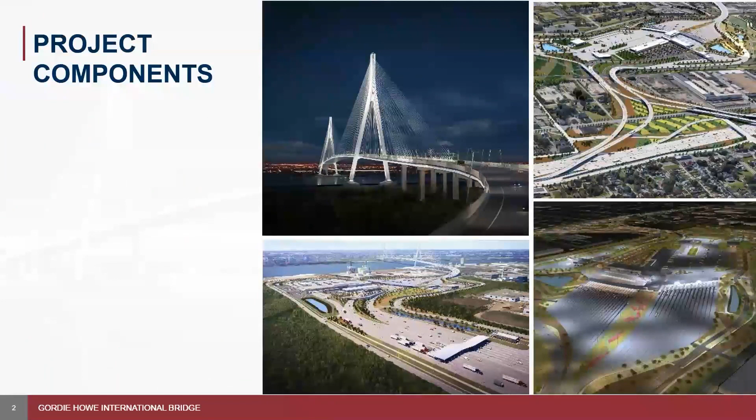We are nearing the peak construction period, which will hit in 2022 and continue through 2023. During this period, 70% of all construction hours are anticipated to occur.

A cable-stayed bridge will be constructed with 6 lanes, 3 Canadian bound, 3 US bound, and a clear span of half a mile with no piers in the water. There are 2 approach bridges, one on each side, and the total length between abutments is 1.5 miles, making this one of the longest cable-stayed bridges in North America. The main bridge towers will be approximately 720 feet high, rivaling the height of the tallest building, the GM Renaissance Center, located in downtown Detroit.

The bridge will also include a multi-use path for pedestrians and cyclists to walk or bike across the border. Use of this path will be toll-free.

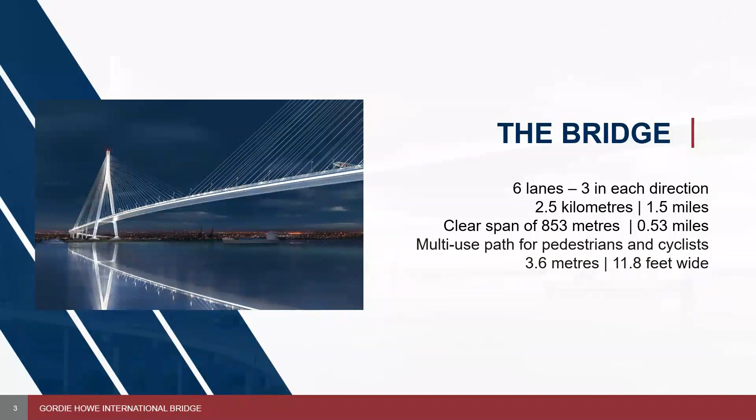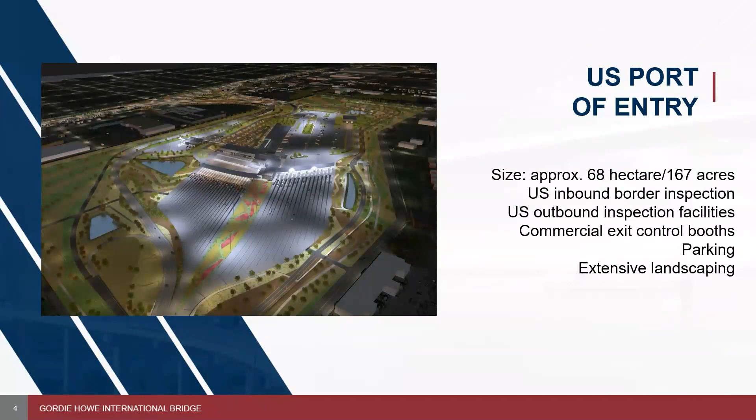The U.S. Port of Entry, located in the Delray community of Detroit, boasts 167 acres, making it one of the largest ports of entry in North America once constructed. Buildings will make up close to 330,000 square feet and include inbound border inspection facilities for both passenger and commercial vehicles, outbound inspection facilities, and commercial exit control booths. The footprint allows for the installation of further technology and the addition of expanded border processing facilities.

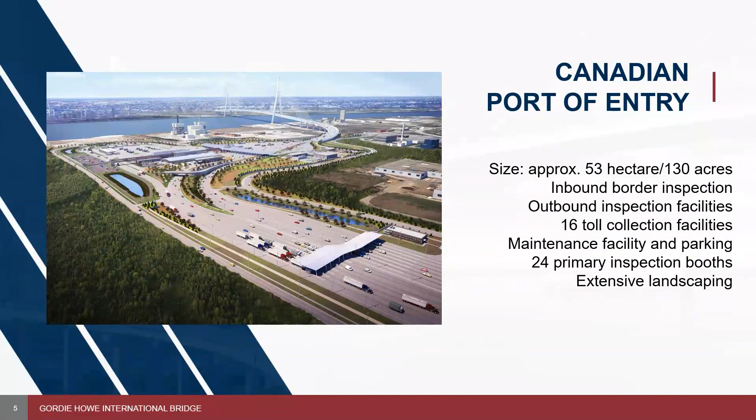On the Canadian side, the Port of Entry is approximately 130 acres in size and includes over 130,000 square feet in building space. Tolling will take place at the Canadian Port of Entry, with 16 toll booths being constructed. Once constructed, this port will be the largest Canadian port along the Canada-US border and one of the largest anywhere in North America. Once constructed, the Gordie Howe International Bridge will connect directly onto the Michigan Interchange, also known as I-75.

As part of the project, I-75 will undergo significant construction activities, including the demolition and removal of existing infrastructure and reconstruction of select local roadways and bridges. This includes 4 new road bridges, 5 new pedestrian bridges, widened roads at key intersections to allow transport trucks to make full uninterrupted turns, primary connecting ramps to and from the US POE, and reconfiguration of I-75 interchange ramps and service drives.

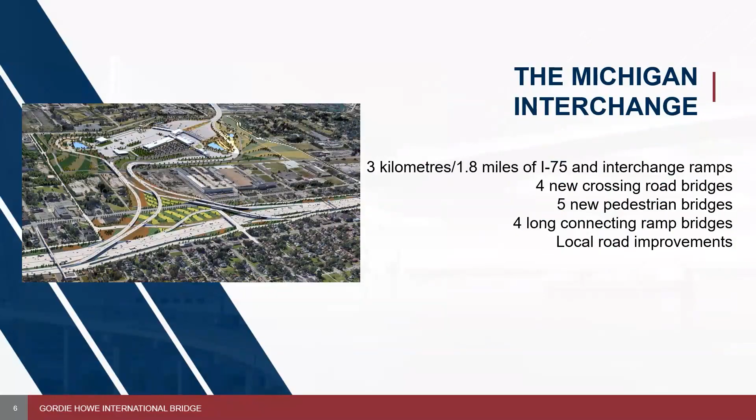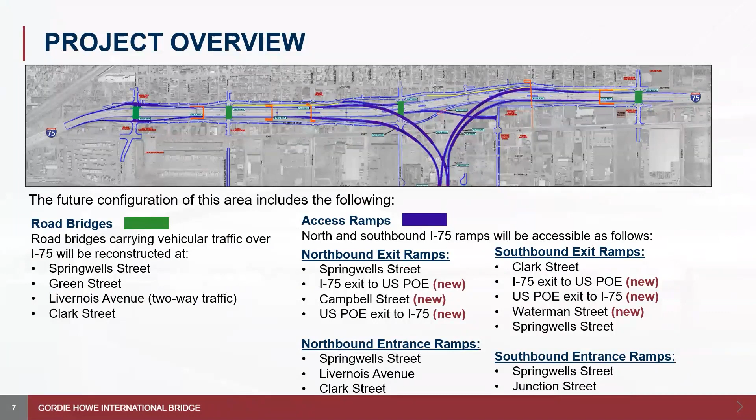To meet requirements included in the final Environmental Impact Statement, or FEIS, Bridging North America plans to construct noise walls, traffic sound barriers, along 3 sections of southbound I-75 to help mitigate traffic noise for nearby residents.

In 2009, the Michigan Department of Transportation, or MDOT, identified locations for the 3 sound walls to be built along southbound I-75. MDOT conducted a traffic analysis in neighborhoods along the I-75 corridor to determine if residents experienced traffic noise impacts. A computer analysis was used to forecast future projected traffic levels. MDOT also completed a more detailed noise wall analysis in those specific areas.

Based on these activities, the locations identified for noise walls are Green Street to Waterman Street, Dragoon Street to Junction Avenue, and Junction Avenue to Clark Street.

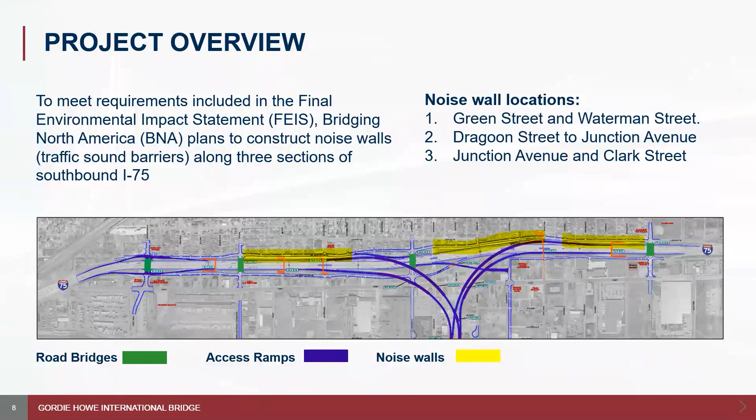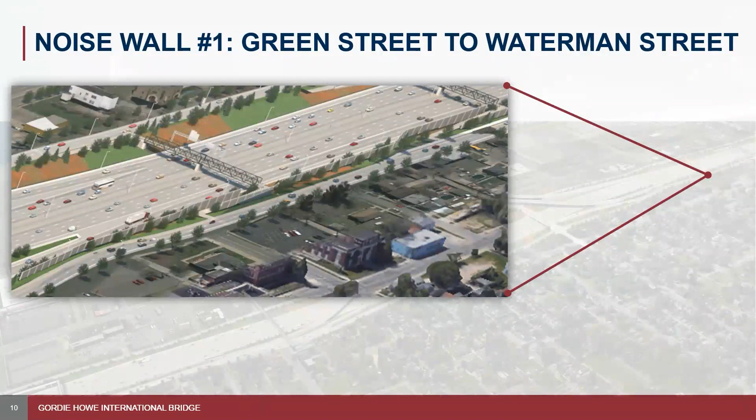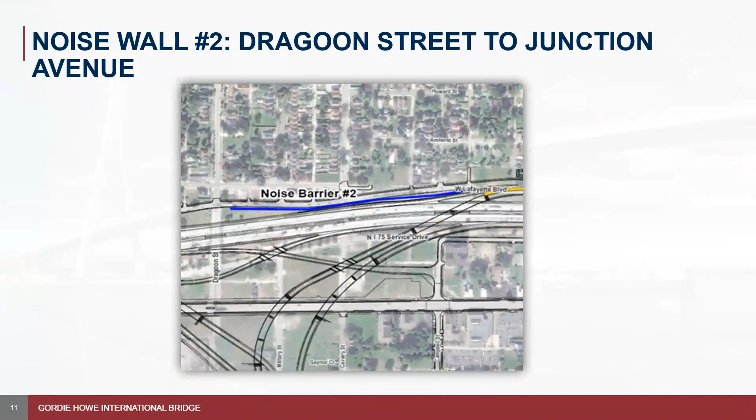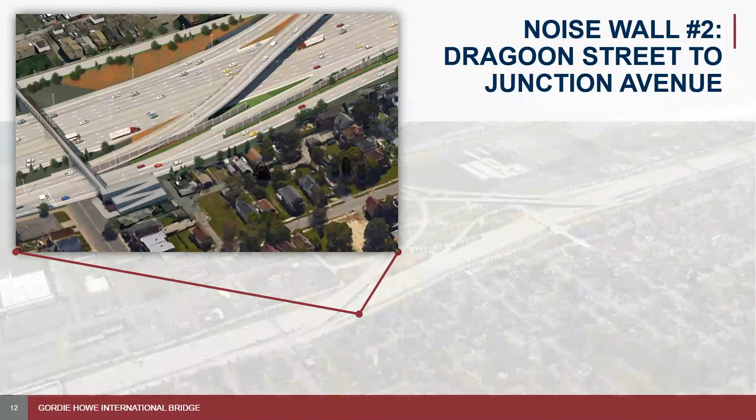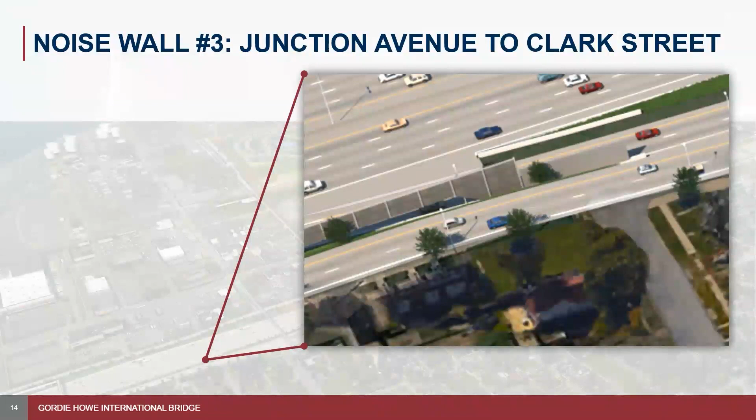Noise wall 3 is to be constructed between Junction Avenue and Clark Street. This artistic rendering illustrates the wall between Junction Avenue and Clark Street. All noise walls will vary in height from 10 to 20 feet.

Going back to how the noise wall locations were identified, prior to 2009, MDOT performed a preliminary analysis of traffic noise in neighborhoods along the I-75 corridor to determine if residents experienced traffic noise impacts. A computer analysis was used to forecast future project traffic levels, and following that, MDOT completed a more detailed analysis for those specific areas. The locations of the noise walls are based on extensive analysis and MDOT's policy of feasibility and reasonableness.

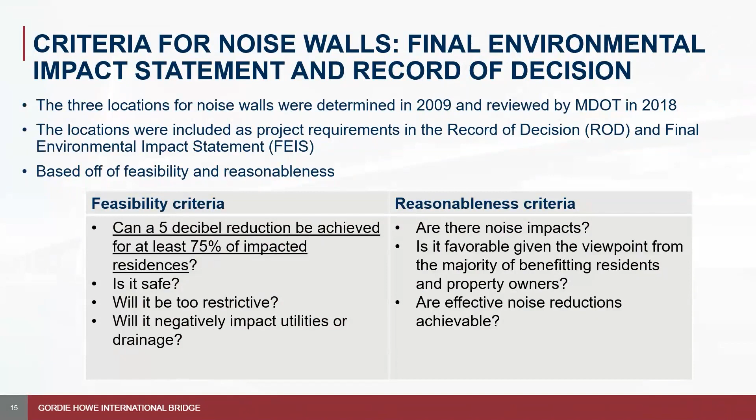You may be wondering what a decibel is. A decibel is a measurement of sound. Loud sounds have higher decibels, while soft sounds have lower. For example, the sound of a food blender would be roughly 90 decibels if you were standing close to it. The sounds you may hear while standing outside in the country at night would be roughly 20 to 30 decibels.

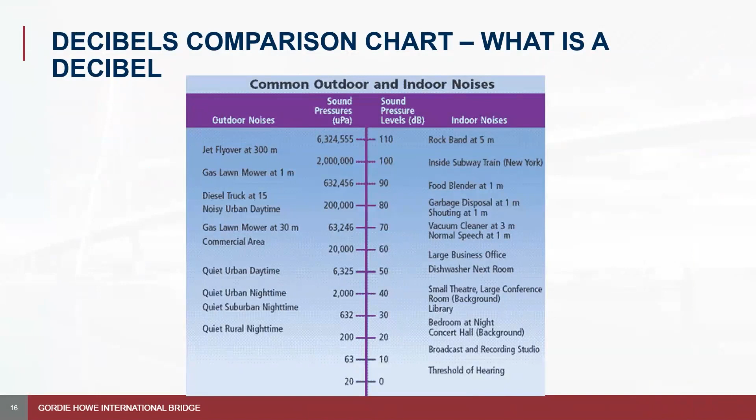The noise walls will be built between the freeway and the service drives on state-owned land. They will not affect the sidewalks on the service drives. Where space is available, trees, shrubs, and grasses will be added where feasible.

The noise wall heights will vary based upon the previous evaluation conducted by MDOT, ranging from 10 feet to 20 feet in some places. Walls will be made of precast concrete panels approximately 8 inches in width. The panels will connect to form a continuous noise barrier.

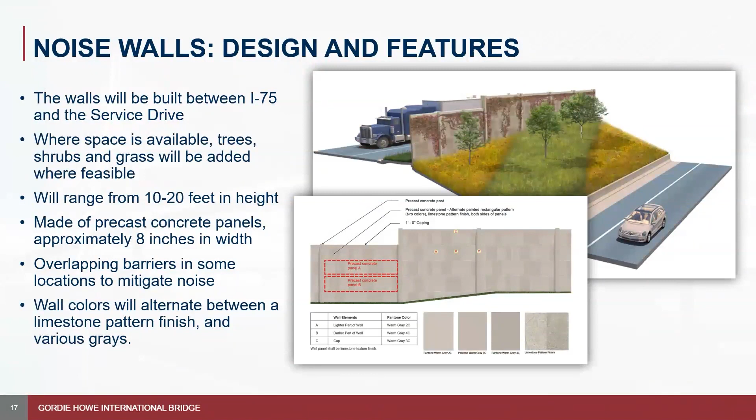The walls will alternate between shades of gray and a limestone pattern finish. Once constructed, the walls will become part of the interstate system maintained by MDOT.

While included in the FEIS, adjacent property owners and residents have a role to play in the noise wall construction process. Residents whose properties are located within the identified noise wall areas and have shown through analysis to receive a reduction in noise of 5 decibels or more are considered to live at benefiting residences.

Please note that your residence may or may not receive a 5 decibel reduction in traffic noise from a noise wall. A vote by people living or owning adjacent properties is required to confirm the construction of the noise walls.

In December, Bridging North America mailed a ballot to the property owners and tenants at the benefited residences adjacent to the noise walls, asking them to complete a mail-in ballot for each noise wall they may benefit from.

The ballot asks for a yes or no on whether the person approves of the proposed noise wall construction. The ballots must be returned by mail in the postage-paid envelope that was part of the package and be received by January 21st, 2022. If you are not contacted, you are not considered to live at a benefited residence, although noise walls may help reduce traffic noise at your home.

Unreturned ballots are considered as approval, or a yes vote, for that benefiting residence.

Results of the vote will be sent by mail to those that received the initial voting package and will also be shared on the project website, GordieHoweInternationalBridge.com. This information is anticipated to be shared in late January 2022.

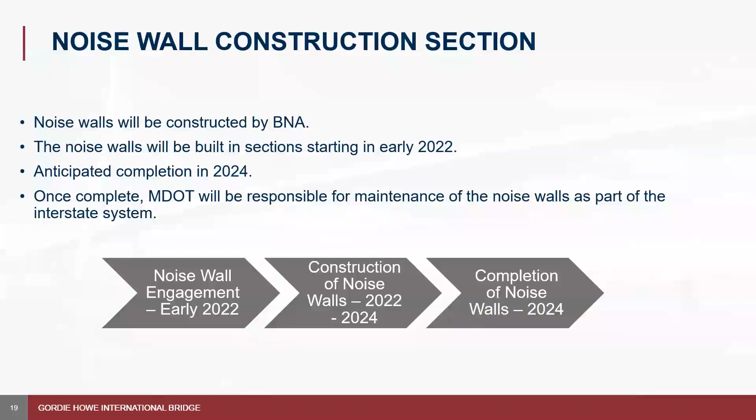Information on construction is available on the project website, GordieHoweInternationalBridge.com, and at the project's quarterly public meetings, which are currently being delivered online due to ongoing pandemic guidelines.

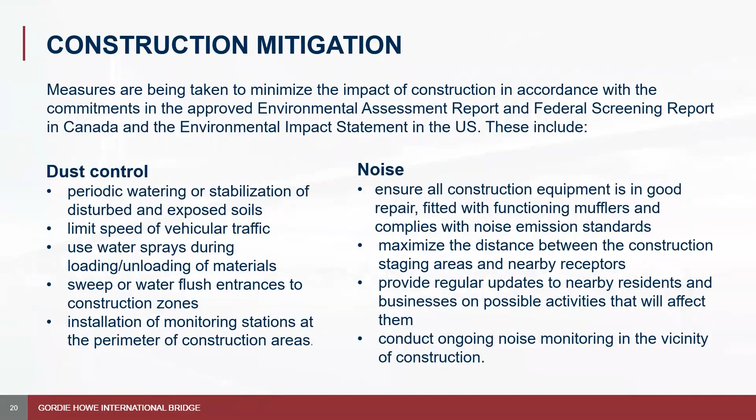This concludes the noise wall presentation.